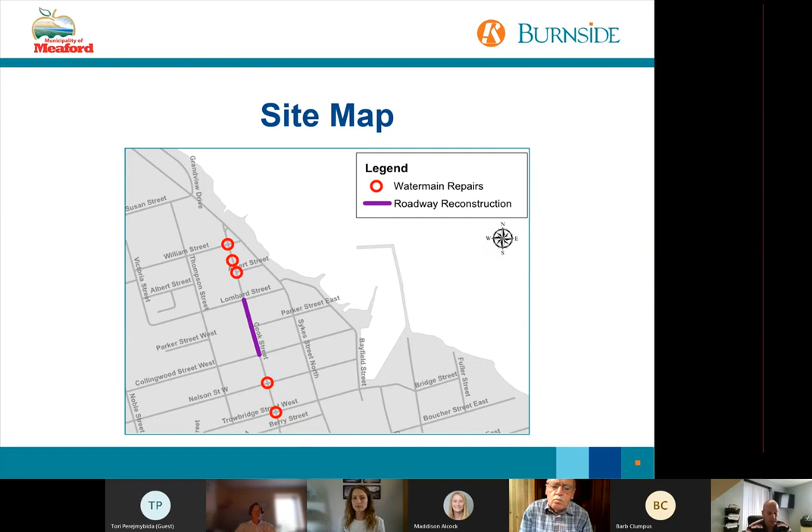The section located between Lombard and Collingwood Streets will be a full urbanization, including water, wastewater, stormwater, curb and gutter, and sidewalk replacement. The overall replacement will ensure potable water is provided to residents for years to come. Thanks. That's a quick overview.

Thanks, Chris. So Burnside completed the preliminary design for Cook Street in 2019, which is an important stage in the planning process. As part of that assignment, a number of activities were carried out to obtain and collect existing information. At that time, a notice was issued by municipal staff to the affected properties, advising that the various fieldworks would take place. The engineering survey was completed by taking measurements with specialized equipment, which is used to prepare a plan that includes existing features along the street, such as sidewalks, utility poles, and property lines.

A geotechnical investigation was required to identify the existing soil conditions. The information is valuable for both designers and contractors. A review was completed of any available studies, reports, and existing engineering drawings. A tree inventory was completed by an arborist, and some trees have been identified to be in poor to fair condition within the proximity of the work. These trees will be reassessed in advance of construction starting.

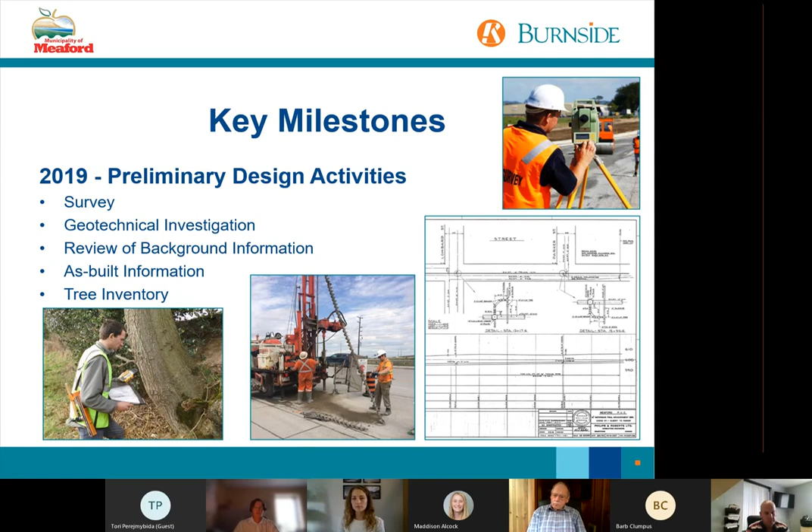In 2021, we started the detailed design, and part of that, we carried out a subsurface utility engineering investigation, which involves an in-depth review of buried and above ground utilities. So as designers, we can identify the conflicts. This also helps us be proactive to any utility relocation work and to help mitigate any known risks during construction.

186 Cook Street, the long-term care facility by People Care. Burnside has been working closely with the designers of the adjacent development to ensure any of their servicing requirements off Cook Street are incorporated in our design. In completing the final stages of the detailed design and the contract package, the design team will ensure that any feedback from the public, approval agencies, utilities, and municipal staff is reviewed and considered and incorporated where possible and where practical.

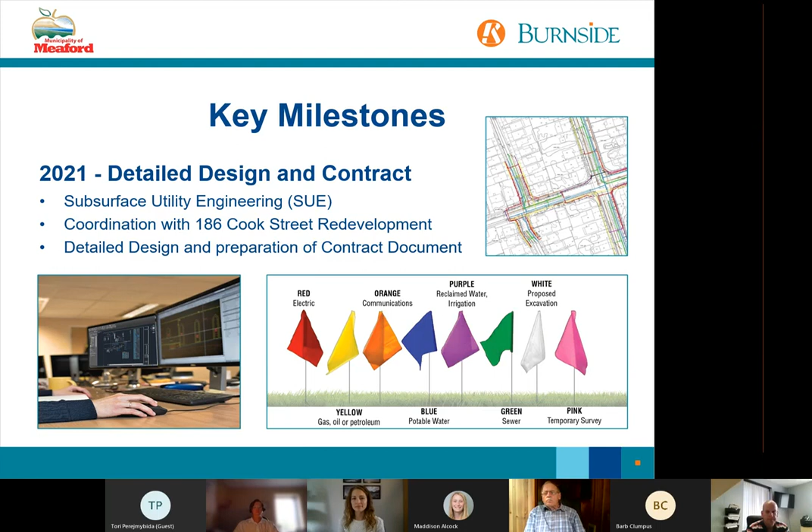The municipality has identified a desire to tender the project in early 2022 with a schedule to construct during the spring-summer. The project status will be confirmed as part of Council's 2022 budget review process. We will now discuss the existing infrastructure along Cook Street from Collingwood Street west to Lombard Street, which covers approximately 250 meters of Cook Street.

Thanks, Rachel. The existing sanitary sewer was constructed in 1977 and is in fair condition. There are no documented concerns by the municipality with respect to sewer capacity or backup issues with either the main sewer or house connections. However, due to the age and fragile nature of the pipe material when exposed to construction activities, there would be a risk of potential damage to the sewer and services from undermining and or compaction activities.

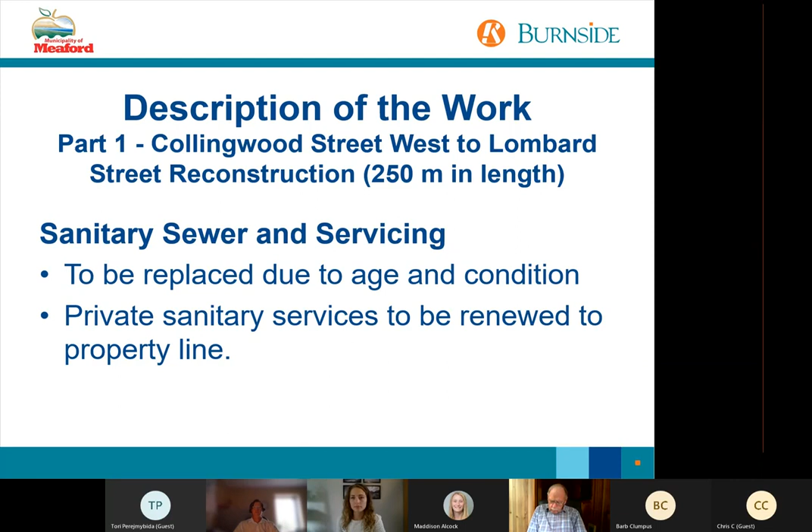8 of the homes are serviced off Cook Street, 2 off Parker Street West, and 1 property off Lombard Street. On the west side of the street, the church is connected to the sanitary sewer on Collingwood Street West. The servicing fronting Cook Street will be renewed with this project. We will now show you a sample of available CCTV video footage of the existing sanitary sewer. This first clip shows a house service connected to the mainline sewer.

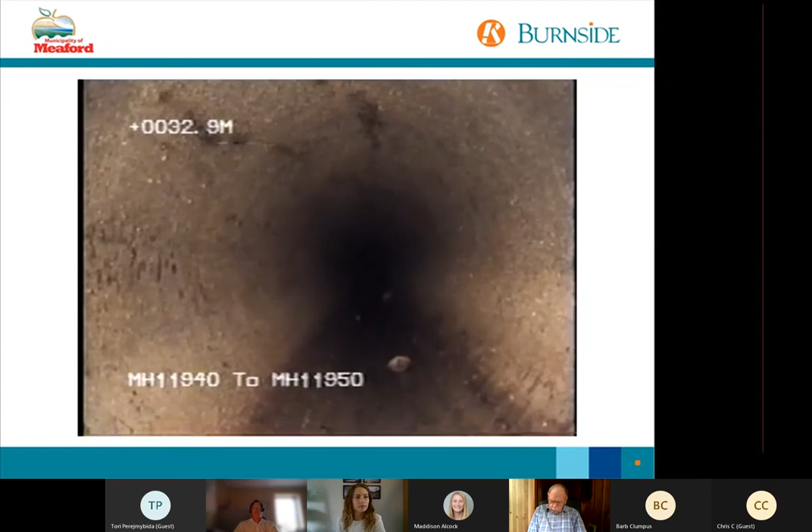The next shows offset joints and buildup called calcite. The buildup is caused primarily by infiltration of water into the sewer pipes through the joints and cracks in the pipe. And finally, a closer example of an offset joint, likely a result of poor installation methods.

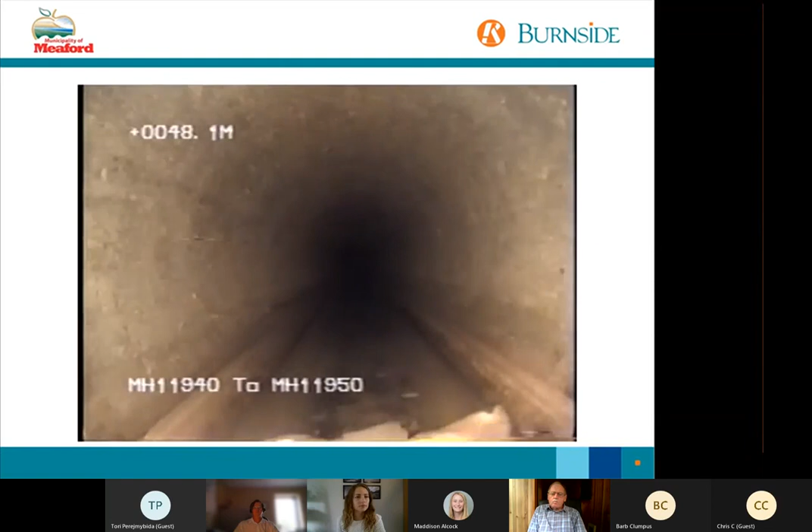We will now describe the existing water main and water servicing along Cook Street. There are two existing water mains on Cook Street. A large diameter water main called the transmission main is designed to move large volumes of water from the supplying source, such as the treatment plant. And connected to it is a smaller water main called the local water main, which distributes water to the homes. The local water main is old and undersized for the area.

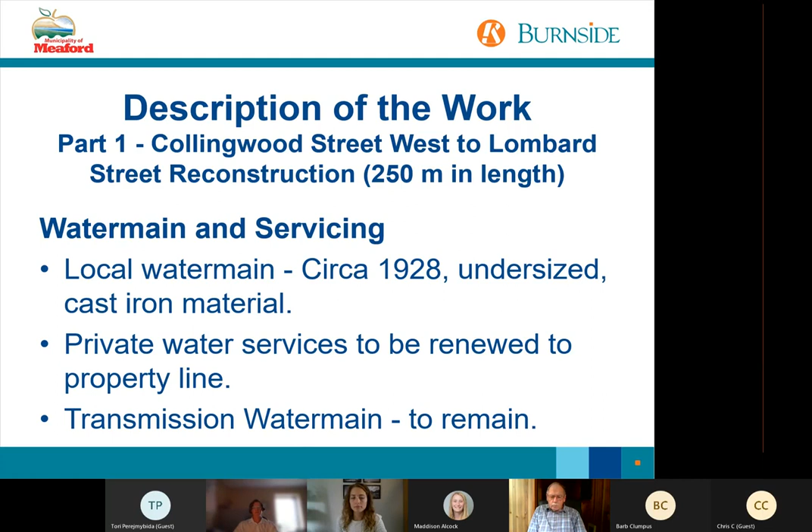The large water main on Cook Street is in good condition and properly sized. However, there are some operational issues and repairs required at select locations to improve isolation activities for operations staff. The water main needs to be repaired. This will help in routine maintenance, construction, and emergency works.

There is an existing storm sewer along Cook Street. During our investigation, we determined that the existing storm sewer has some operational issues and is undersized for the Cook Street catchment area. So as such, we will be replacing the existing storm sewer with a larger diameter storm sewer during construction. This will generally be in the same location as the existing storm sewer. We are also taking the construction opportunity to install more catch basins along the road. This will capture the stormwater quicker and will help reduce nuisance ponding during storm events.

The existing road is a local urban cross-section with curb and gutter, and there are underlying deficiencies with pavement structure evidenced by the various settlements, patches, failures, and cracking in the roadway. The existing bus laneway adjacent to 186 Cook Street, which is on the west side of the street, is partly located within the municipal right-of-way and will be removed as part of the redevelopment plans for 186 Cook Street.

On-street parking is permitted on both sides of the street with parking restrictions bylawed on the east side of the street only. The parking restrictions on the east side were implemented when the school was open and do not practically apply since it closed in 2016. The road is actually not practically wide enough to accommodate 2 through lanes and parking on both sides as currently exists.

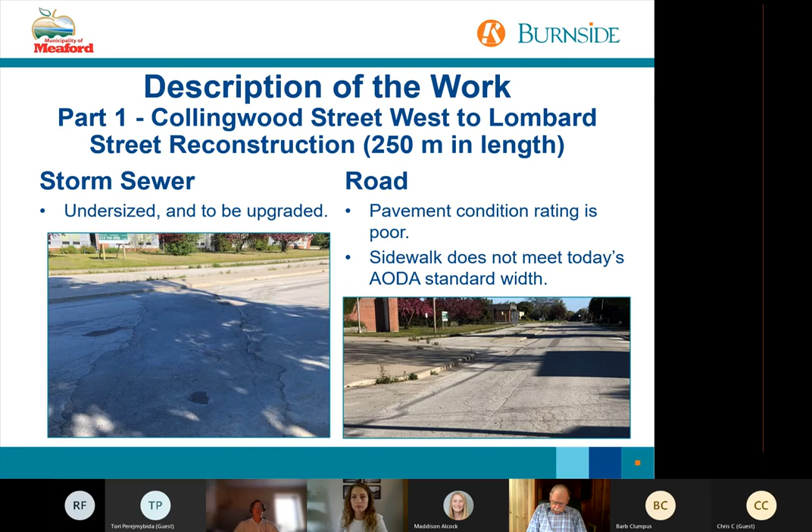So the proposed design. The road has been designed to match the existing pavement width with no opportunity for widening without negatively impacting driveways, trees, and utilities. The new design includes a 1.5 meter AODA compliant sidewalk to be constructed along the west side of the street only, and it provides a continuous link to the existing sidewalks along Cook Street, north of Lombard Street and south of Collingwood Street West. The existing sidewalk along the east side of the street between Collingwood Street West and Parker Street West will not be replaced.

Extending the sidewalk to the north from Parker Street West to Lombard Street was reviewed by the design team and municipal staff. However, adding a sidewalk in this location would reduce the length of driveways and impact parking opportunities for the residents. As well, it would conflict with tree roots. The bus laneway will be removed by the developer of 186 Cook Street as part of the redevelopment plans.

Hydro utility conflicts have been identified and relocations will be coordinated prior to construction. Placement of the surface layer of asphalt will be deferred for 1 year, which is a typical practice to allow for construction-related settlements to occur.

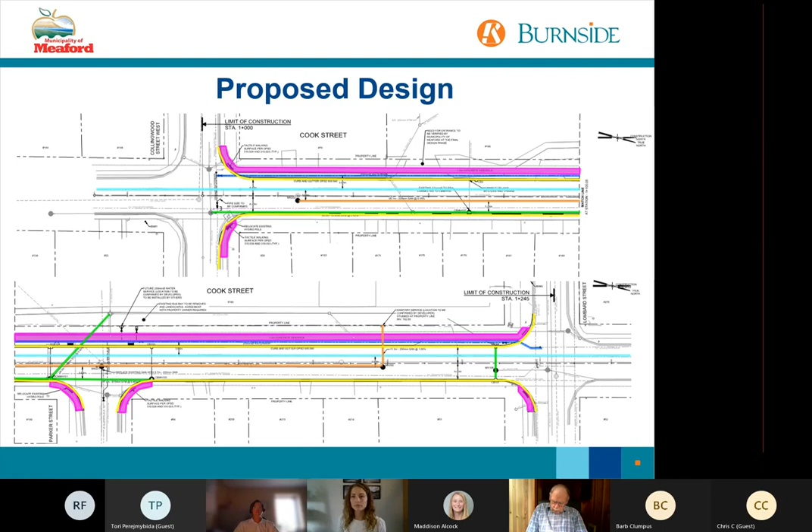The new larger storm sewer will be located along the east side of the street, with a majority of the surface water outletting to Collingwood Street West. As well, a short section of the existing sewer will be renewed at Lombard Street.

Vic will now discuss the water main upgrades at the 5 locations along Cook Street. The existing large water main along Cook Street is sized appropriately, but some of its components have reached their service life expectancy and now do not allow for reliable water main isolation by operations staff during routine maintenance, construction, emergencies. The upgrades will be completed at the following locations along Cook Street, as Chris had mentioned earlier, including William Street, Albert Street, Nelson Street, Trowbridge Street West, and at mid-block, between Albert and William Streets.

The newer water main on Thompson Street will be utilized to divert existing flows, while the large water main on Cook Street is being isolated for the repair work.

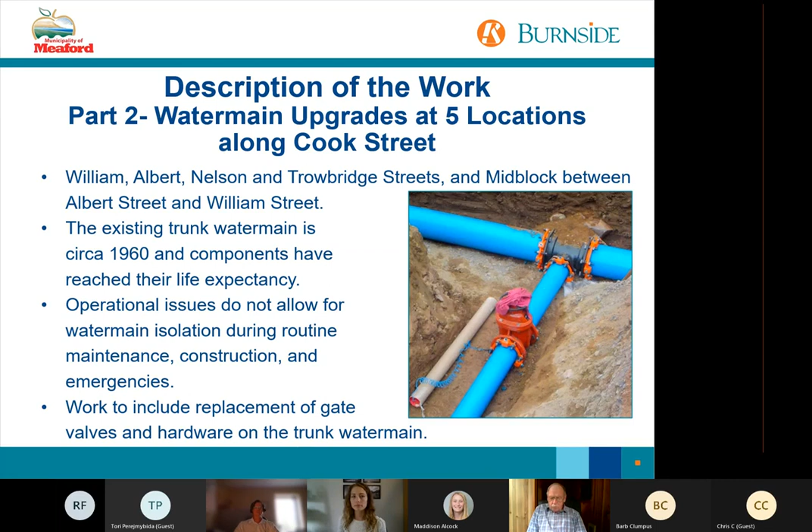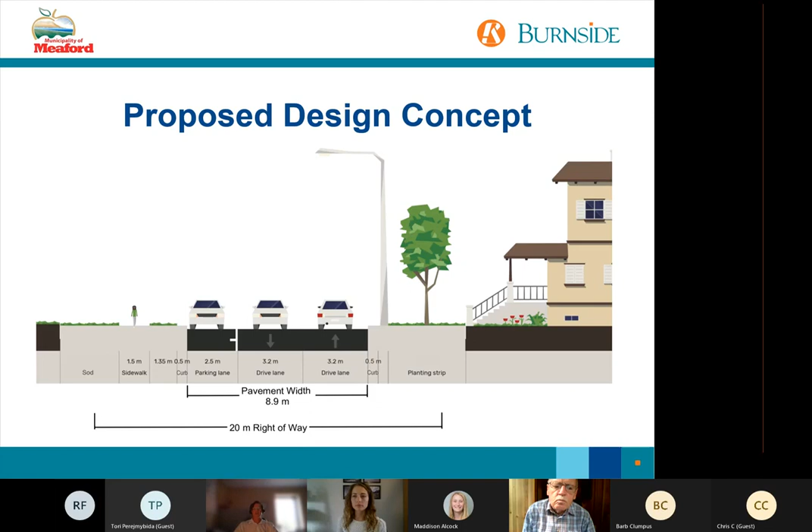Next slide, please. Okay, Vic will now get into discussing the proposed design concept for Cook Street. So our proposed road cross section for Cook Street between Collingwood Street West and Lombard Street will consist of the following features: new concrete curb and gutter, new concrete sidewalk along the west side of the street, including tactile walking surface indicator plates at intersection ramps. These plates are an AODA requirement intended to be detectable underfoot and used to alert people with low or no vision of potential hazards, such as traffic.

Wide sodded boulevards. The road is too narrow to properly accommodate parking on both sides of the street. To correct this condition, the parking bylaw could be amended to restrict parking along the east side of the street and only permit parking along the west side.

The west side offers more available space for vehicles to park compared to the east side, where space is limited due to the greater number of driveway approaches. The parking lane and spaces could be delineated with pavement markings. By doing this, the road will appear narrower and encourage lower traffic speeds, and introduce a permanent traffic calming feature.

Burnside has also incorporated an accessible parking space in the design. The proposed pavement marking plan can be tested by installing the paint lines on the base asphalt and monitored for effectiveness over a year. Then prior to placing the surface layer of asphalt, a decision can be made as to whether the painted spaces should be maintained as a permanent feature.

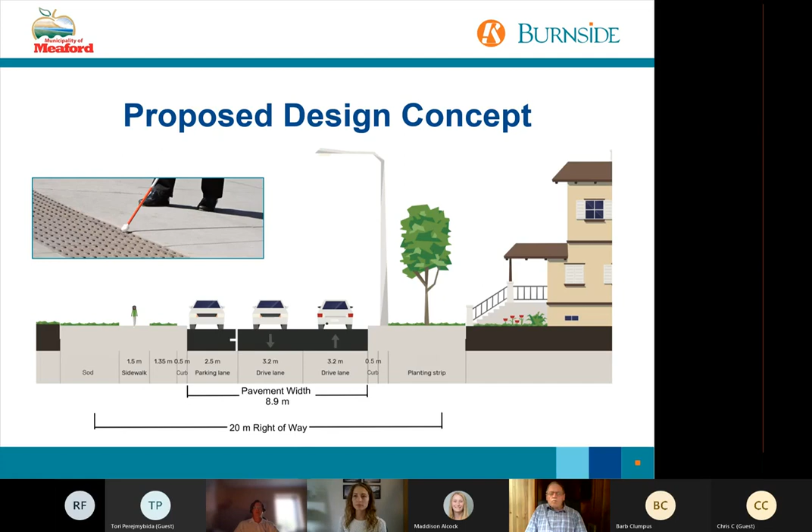Next slide, please. Okay, we will now discuss the construction staging. So we expect the construction to take approximately 4 months to complete during the spring, summertime 2022. The suggested sequencing plan for construction operations is as follows. If possible and practical, relocation of utilities would be coordinated before the reconstruction starts. First would be the installation of the new local water main and transferring of new water services from the homes before abandoning the existing water main,

installation of the new sanitary sewer and transfer of new sanitary laterals, repairs to the existing 400 millimeter large water main, installation of new storm sewer and catch basins, road excavation and placement of new granular material. That would be followed by the installation of the new curb and gutter and sidewalk. Final grading on the road, and then we pave. Driveway and boulevard restorations will follow, and then finally the pavement markings and signage would be installed.

The road will be closed to through traffic. Residents living within the construction zone will be required to park on adjacent streets while work is taking place. At the end of each working day, the road will be restored to provide local access for residents. Emergency access to the properties will be coordinated by the contractor and will be available at all times.

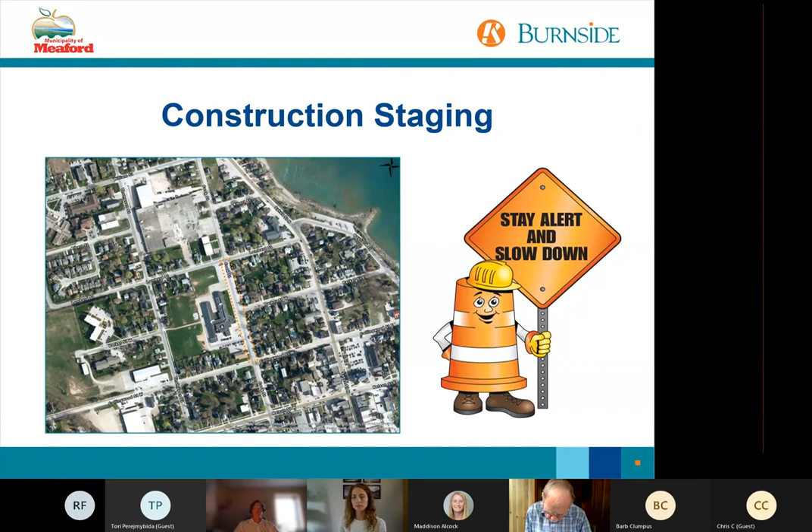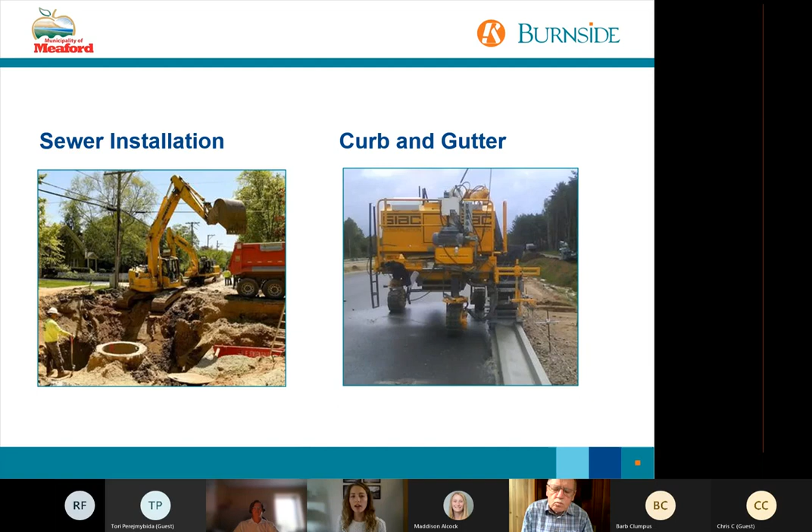The base course asphalt will be placed in 2022, and the surface course asphalt will be placed the following year in 2023. So as Vic mentioned before, this is done to allow for any construction-related settlements to occur and be mitigated by the surface course asphalt placement the following year. You will be able to use and drive on the roadway during this 1 year period with just the base course asphalt placed. The final construction step in 2022 is restoration of the boulevards and the driveways.

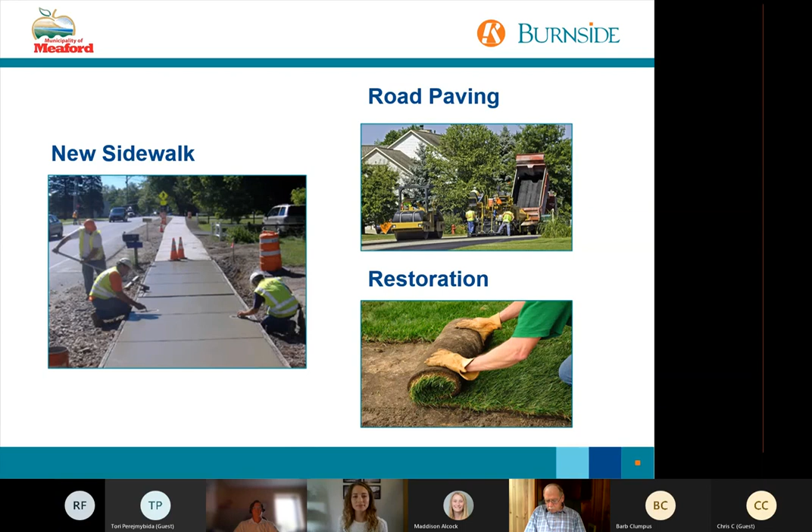So what are our next steps? Well, first we need to incorporate the comments that we will receive following this presentation, but also those that we will receive from municipal staff, utilities, and any approval agencies. And some of those agencies include the Ministry of Environment, Conservation and Parks, and that would be for the sanitary and storm sewers and the water main. We also are applying for approval with the Grey Sauble Conservation Authority for the storm sewer work.

Following that, what we hope to have completed for the fall is the final design drawings, our preliminary costing, and the contract package, and obviously to secure approvals. Now, the approvals need to be secured prior to the work starting. With a schedule by end of 2021, we'll be in satisfactory condition to have this tender released for construction early in 2022.

Now, the tendering period and award of the project, as I said, would be early next year, so January, February. And that is typically the best time to be tendering, as there are a lot of contractors looking to get their years started. So the competition for work is quite aggressive.

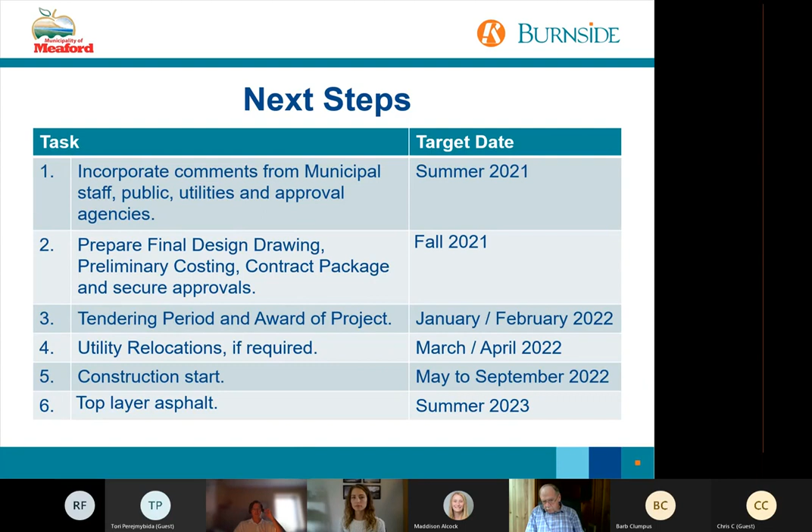Yes, Harley, I see you have your hand up. Yes, can you hear me? Yes. Okay, thank you. Well, first of all, thank you for the presentation. Very interesting, very major project in our urban area. I do actually have 3 questions, but I'll start off with one, if I may.